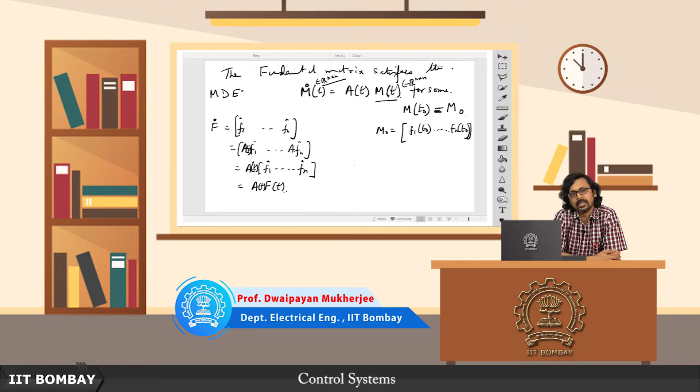Hello and welcome back to another lecture on control systems. In the previous lecture we started to look at this curious object called linear time varying systems. They are different from what we've studied so far in that they are time varying, but at the same time they share some fundamental similar properties with the systems we've studied, in that they are still linear nonetheless. So we expect some nice properties to carry over, while quite a few other properties vanish into thin air.

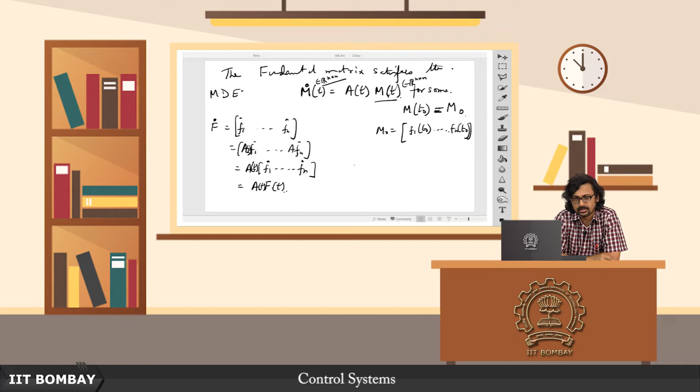That's probably one of the motivations behind looking at this, apart from the fact that we can take a peek into linear time varying systems using the state space method, which would otherwise not have been possible if we were dealing only with Laplace transform and transfer function domain methods, that is classical control methods. Since we can, why not have a glimpse of what this has to offer. This is just a sort of digression, an excursion. We are not really looking to build a solid theory of linear time varying systems in this course.

What we saw in the last lecture, as you can see in the slide, is that we defined this so-called fundamental matrix. The starting point when we try to look for a solution of this linear time varying system is: if you can cook up these n vectors of functions, f1 through fn, such that each of them is a solution of the state space equation, that is x dot equals Ax, for different initial conditions at a given time instant t0, then you have some hope of obtaining the solution.

By no means am I suggesting that this is a trivial task. You can immediately see there is no straightforward method, no one is going to whisper into your ears what the solutions are going to be. There's that clause, that 'if' is a big if. So if you can actually obtain those n so-called linearly independent solutions for the state space system, then you can get any solution for any given initial condition. That is the whole crux of the matter.

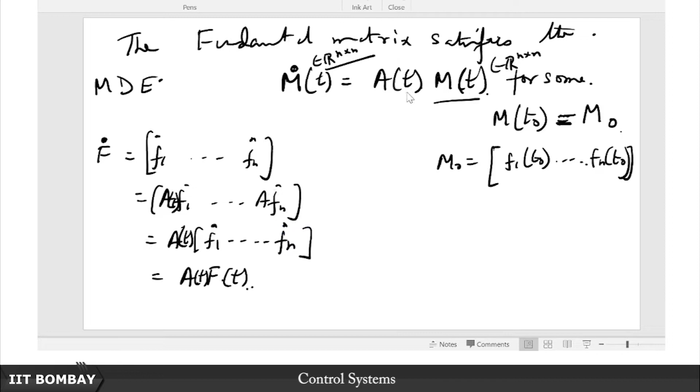So what does this say? We know that f dot is equal to A times f, and now we have this x naught written as f(t naught) times some vector c. So from this, can I not write that c is f(t naught) inverse times x naught? Of course I can, because f(t) is invertible for every time t. If it were not, it would be non-invertible for every time t - that is what we proved the other day, that is the beauty of that result. So then I can write c in this fashion.

But why am I interested in writing c in this fashion? Why exactly do I want to write c this way? Because remember, f(t) dot is equal to A(t) times f(t). This is true, is it not?

Now I am trying to find a solution for the equation x(t) dot equals - we want to solve the homogeneous equation, that is no forcing function, x dot equals A(t) x(t) such that x(t naught) equals x0. So this is what we are looking to solve.

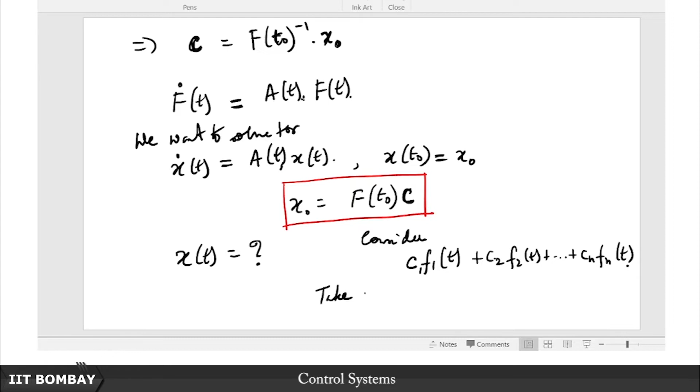Just think for a while: if you take, say, C1 F1(t) plus C2 F2(t) plus dot dot dot till Cn Fn(t), then take its time derivative. Let us say this is something I have cooked up, these same Ci's which describe my initial condition. Then what do I get? I get C1 F1 dot, omitting the T, plus C2 F2 dot plus dot dot dot till Cn Fn dot. But what is that in turn?

Notice that is going to be nothing but C1 A(t) F1(t) plus C2 A(t) F2(t) plus dot dot dot till Cn A(t) Fn(t). So that is nothing but A(t) times F(t) times C - should not write implies, it is basically equal to, so this is equal to this.

So I first started with this whole thing that I am putting in the green box now as a trial. Remember early on when you did not know these different methods of solving a differential equation, we just tried some solution to see if it works. So here we are trying to do exactly that. We will check whether this works for us.

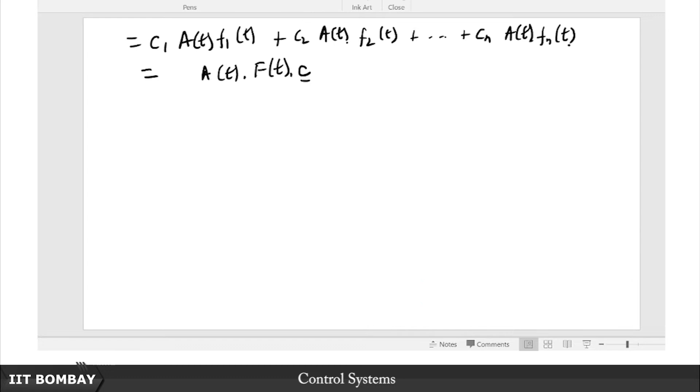Now what is this? Remember that this is nothing but F(t) times C is equal to this. So what we found now is that F(t) times C satisfies x(t) dot equals A(t) x(t), and also, by the way we have chosen this C, it satisfies the fact that f(t naught) C is equal to x naught.

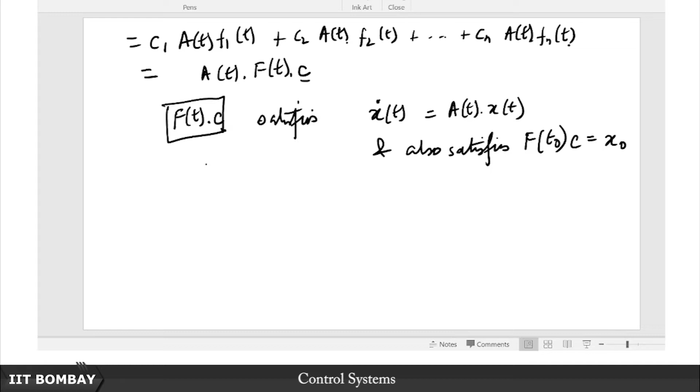So therefore this is my candidate for a solution, and again I am going to invoke that property of uniqueness. If I found one solution, then that has got to be the only solution - again something I am stating without proof. So I tried with a trial solution.

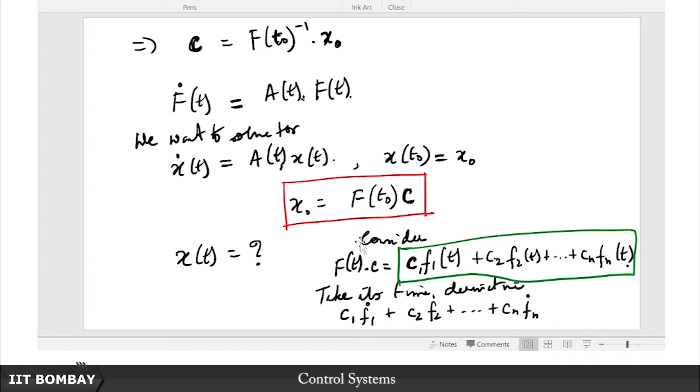What I did was: you give me an initial condition, suppose somehow someone else has given me this set of n linearly independent functions, each of which - by functions I mean n-tuple of functions. So there is f1 which is an n-tuple of functions, f2 which is an n-tuple of functions, so someone has given me this fundamental matrix, and then you give me some initial condition.

Then the trick to finding the solution is I try to find out what linear combination of the columns of the fundamental matrix at t equals t0 gives this initial condition that you have given me. Once I am able to evaluate that, I can do so using this, because f(t0) is invertible - in fact f(t) is invertible for every t, as we proved the other day - so therefore I can always obtain this C.

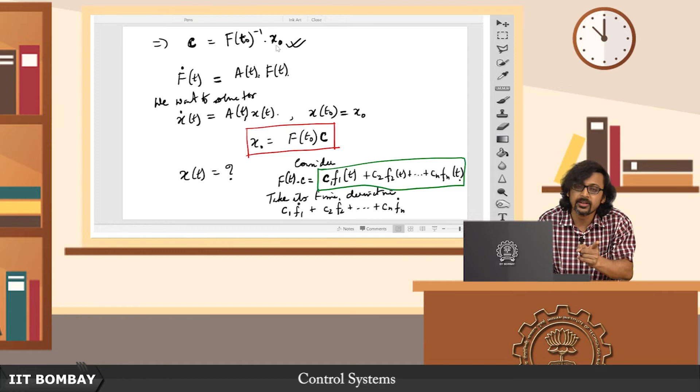So now once I have obtained this C, what I need to do is say that f(t) times C, where f(t) is this fundamental matrix which somebody has already given me, and C is something I have obtained based on the initial condition. I am claiming that f(t) times C is a solution of this homogeneous linear time varying equation, and I have shown you it satisfies the initial condition as well as the dynamics, therefore it must be a solution. Now, without proving it, I am just claiming that this has a unique solution. So if you find one solution, that is the only solution. Since I found that one solution, this is the solution.

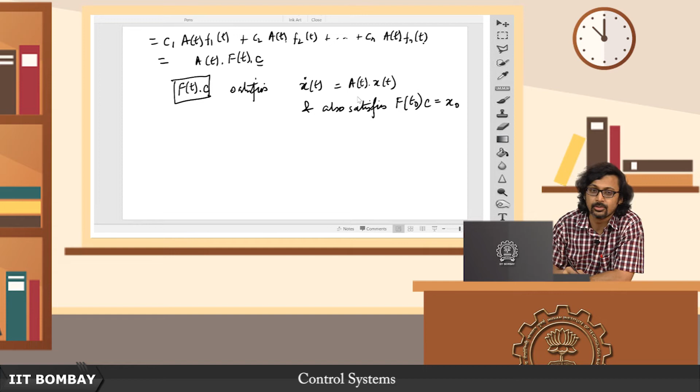So the solution is x(t), let me put that inside a green box: x(t) is equal to f(t)C. But you might not be happy with the C, after all the C is something I have obtained. This doesn't give me something methodical. The thing I started with is F, the fundamental matrix. Someone's given me the fundamental matrix, someone's given me x naught, so I want the solution in terms of those only. But the C is something I derived along the way.

So how do I replace this C? It's already there before you. I'm going to substitute C here, and then the final solution is going to be x(t) is equal to f(t) times f(t naught) inverse times x naught. And now you see I have got the entire solution.

You give me any initial condition, someone's given me the fundamental matrix, which is basically a set of n-tuples of functions such that each column of the fundamental matrix is a solution of the state equation, and those n-tuples are linearly independent. So someone's given me the fundamental matrix, someone's given me the initial condition, and I can tell them you need look no further, this is going to be the solution. Now it turns out for this you just need knowledge of the fundamental matrix, just substitute t's and t0's, t0 being a constant, the same initial instant from which you are starting your ODE, your observation starts at t0, so it's the initial value problem.

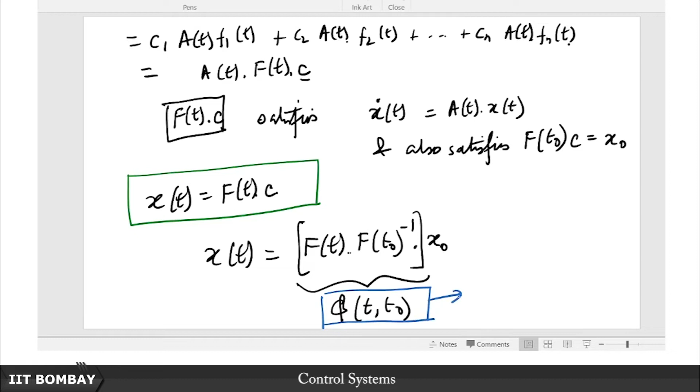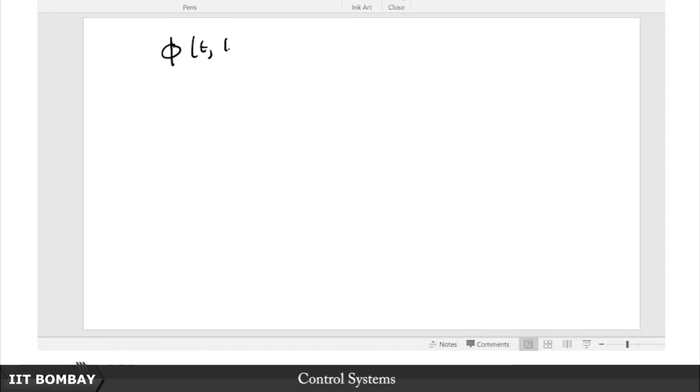Now I'll define another term here, this turns out to be defined as the state transition matrix. So far I have just been talking about this fundamental matrix, now this is called the state transition matrix. What is the state transition matrix? It is defined in this fashion: if you know what a fundamental matrix is, then the state transition matrix phi(t, t naught) is given by f(t) times f(t naught) inverse. So this is the definition.

So this is what it is. So why is this t comma t naught? Because it is time varying, you see. So as I showed you the other day, if it is time invariant, then the only thing that matters is the duration of time that has elapsed since you started your observation and the current instant.

So whether you start your observation in 2021 and look 1 year hence, whatever solution you get, if it is a time invariant system, then if you had set up your equation in 2015 and looked 1 year hence in 2016, you would have got exactly the same solution, since it is linear time invariant. But for a linear time varying system, the system has changed, the parameters have changed with time.

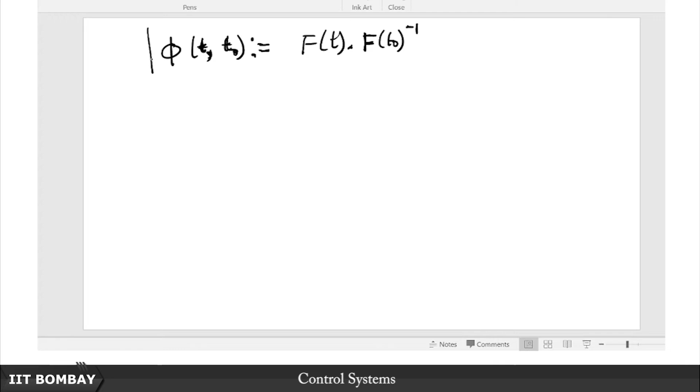So whatever output you got 1 year later by setting it up in 2016 or 2015 would not be the same as what you would get by setting it up in 2021 and looking for the solution in 2022. That is the case of a time varying system. So therefore you cannot just define this as a function of t minus t naught, but it is dependent on when you are looking for the solution and when you started your observation, both these instants, not just their difference, very important. So this is how we define the state transition matrix, and now you should be able to recall something very similar that we have done just a couple of lectures back.

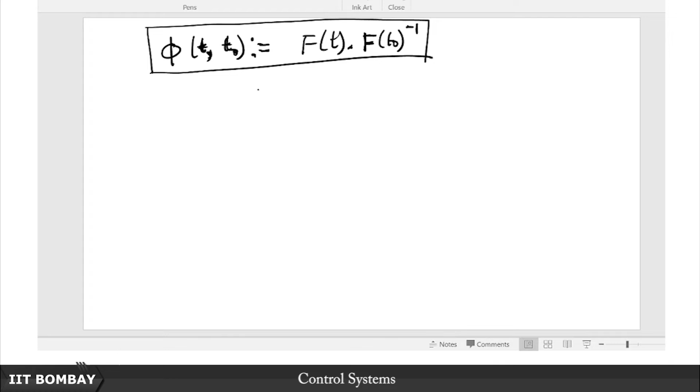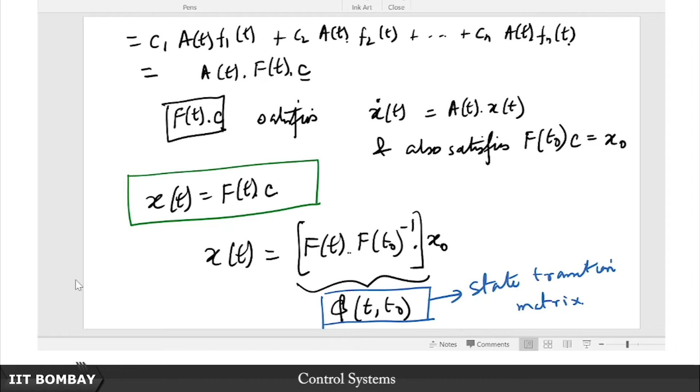It turns out that this has an uncanny resemblance with something we already know, the matrix exponential, remember, in case of the linear time invariant system. It turns out that the matrix exponential is nothing but the same state transition matrix for a linear time invariant system. So immediately there are a few properties of this state transition matrix.

So some quick properties - they are not really very difficult once you know how you have obtained this state transition matrix from this fundamental matrix. Once that concept is clear, you would know that it is obvious.

The first property is that phi(t, t naught) is non-singular for every t. Why should it be so? Well, of course, just see what is the definition here.

So check that f(t naught) f(t) inverse is an inverse for phi(t, t naught) for all t. Just try it out, just hit this fellow either on the right or on the left with this fellow, and you see you will end up with identity. So, if at every value of t there is an inverse for this fellow, this state transition matrix, then obviously it is going to be non-singular.

And why am I sure that this f(t) inverse will exist? Again, go back to the definition of fundamental matrix, the property we proved for the fundamental matrix, the fact that the fundamental matrix must be non-singular for every time instant t. That is its very definition, its property. So this is a very trivial property then - once you know that it comes from the fundamental matrix, there is really nothing to prove here.

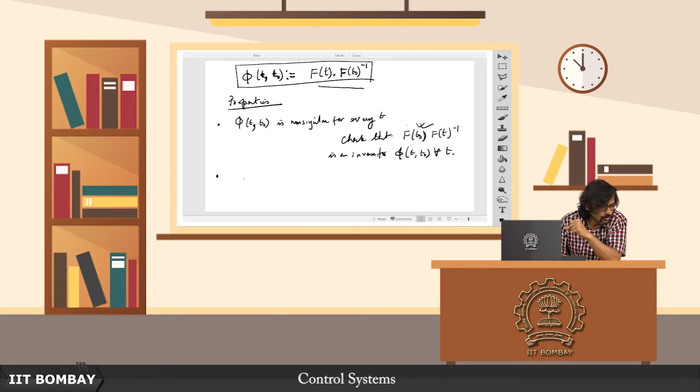The second property is that phi satisfies this: phi(t, t naught). If you take the partial derivative with respect to time, it satisfies the matrix differential equation with initial condition phi(t0, t0) is equal to I.

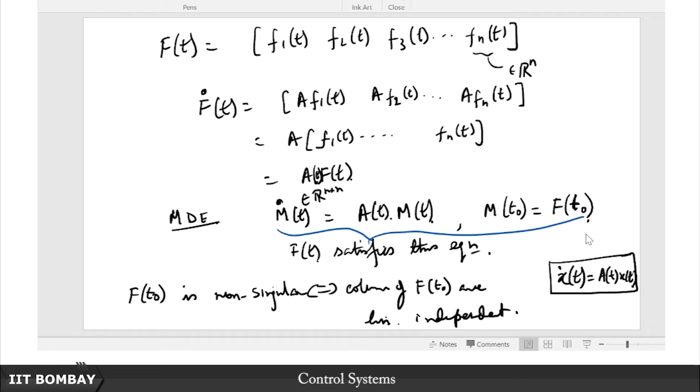So that same equation you see what we started with earlier when we were dealing with the fundamental matrix. When we talked about it in terms of the fundamental matrix, then the initial condition of this matrix differential equation was f(t naught). Now, I am saying if you want the initial condition to be the identity, then your fundamental matrix...

So basically it is like if you know of any iterative method - that is why I said it is not a trivial problem. This analysis, all this we are doing, is fine, but computation-wise it is a very difficult problem to obtain the state transition matrix. By no means is it trivial. So if you know of any computational method by which you can iteratively keep integrating, Euler integration or whatever, then you set up your matrix differential equation with an initial condition equal to the identity and you keep integrating it. What you will get at the output of the integral is basically going to be this state transition matrix. Not a very wieldy way, is it? It is rather unwieldy.

That has been a long standing problem, how to actually get efficient, computationally efficient methods for getting this state transition matrix. It is not like evaluating e to the At, for which we have seen already three methods. Of course, that is again not to say that computationally that is an easy thing to compute e to the At - we are talking about hand computation for the purpose maybe for your examination or for your concepts, where we mostly do not go beyond 3 by 3 matrices. For large matrices, even evaluating e to the At, that is the state transition matrix for a linear time invariant system, is also not a very easy task.

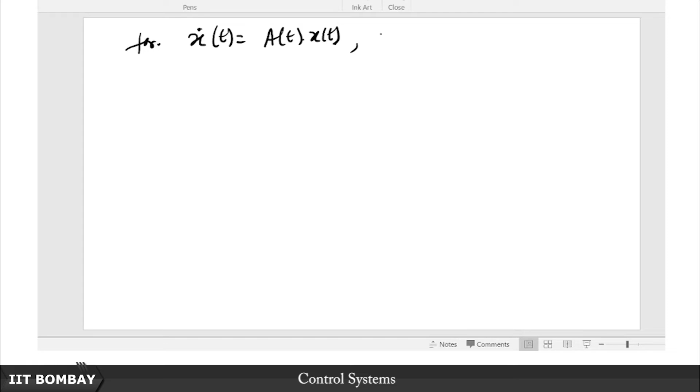But why is this important? Why is this so interesting? It is interesting for the simple reason that, now notice that for x dot(t) is equal to A(t) x(t) with x(t naught) equal to x naught, we have x(t) - earlier we described the solution in terms of the fundamental matrix, now we will describe the solution in terms of the state transition matrix, and that is what justifies this name.

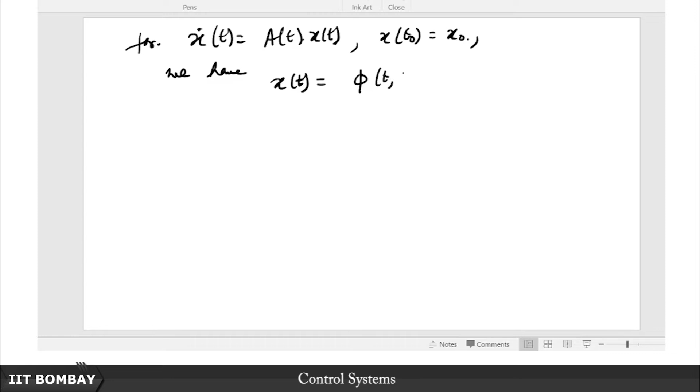What is this showing me? This transition matrix is like an operator to which if you give the input, the state vector at some time instant t naught, then the output of that operator will be the state vector at the time instant t. It is as if it is telling you how the state transitions as time evolves, how the state transitions from one particular bunch of values to another.

So without even looking at the differential equation, without solving for this, once you know the pattern of this phi t comma t0, the state transition matrix, then this actually tells you how your state transitions. So the name is very common sense based, that is why it is called a state transition matrix.

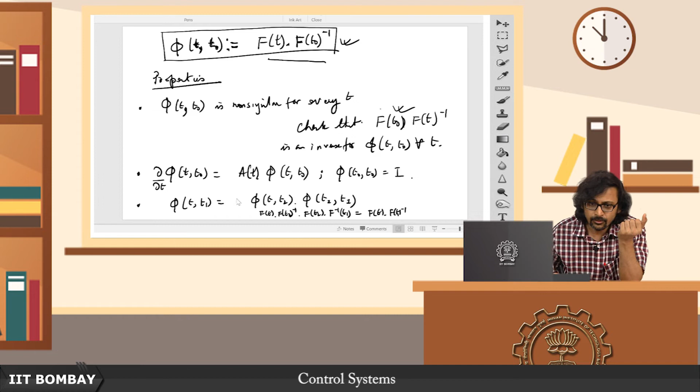Now notice, in the light of this, what does this tell you? It tells you that if I have 3 instants of time, say t1, t2, t3, and I know the state vector at t1, at t2, and at t3, then I am saying that for this bit the transition matrix is phi t2 comma t1, and for this bit the transition matrix is phi t3 comma t2.

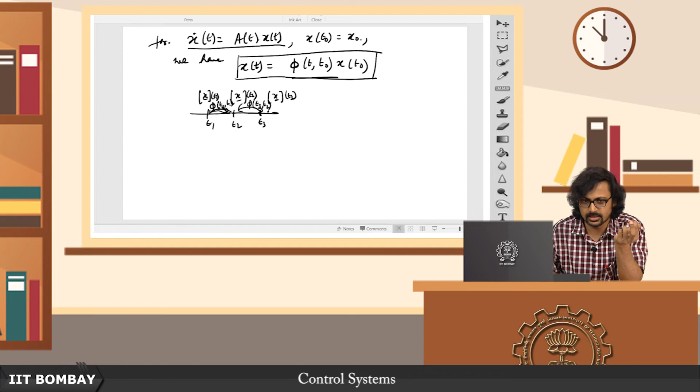So it turns out that if you know piecewise, in these small segments, the transition matrix, then this is like composition of operators. If you want to find out the overall transition matrix from t1 to t3, all that you need to do is multiply those two matrices: phi t3 t2 times phi t2 t1, that is going to be equal to phi t3 t1. So this entire transition from t1 to t3 is captured by these piecewise transitions from t1 to t2 and t2 to t3. That is what this property is telling us.

So that is why this is an interesting and important property. You can immediately relate to this state transition matrix in exactly the same way as you did with the matrix exponential for the linear time invariant system. Having come this far, it would be sad if we did not go a little further and try to draw the analogy and completely close the case thereafter.

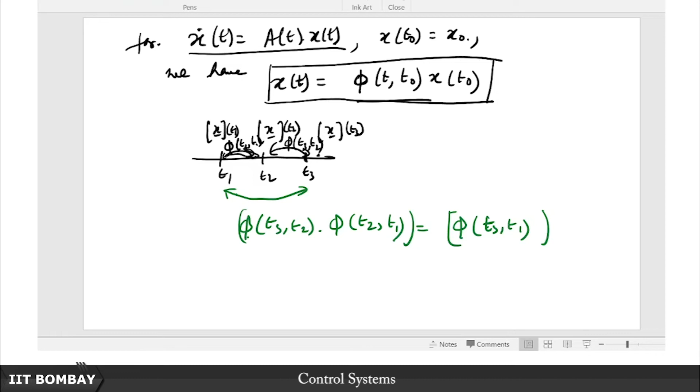So what are we trying to do here? We are trying to draw some analogy, some parallels between the linear time invariant case and the linear time varying case that we are now seeing. Here is the first sort of claim, which is a little non-trivial. I am not suggesting that this particular result is going to help you computationally in obtaining the state transition matrix, but here is the claim.

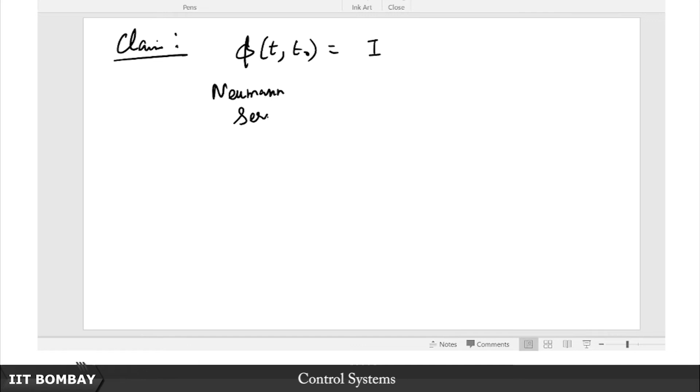The claim is that this phi t, t naught is given by this series, this is called the Neumann series - I do not remember if it was a double n or a single n, excuse me for that. So this is given by the integral from t naught to t of a tau 1 d tau 1,

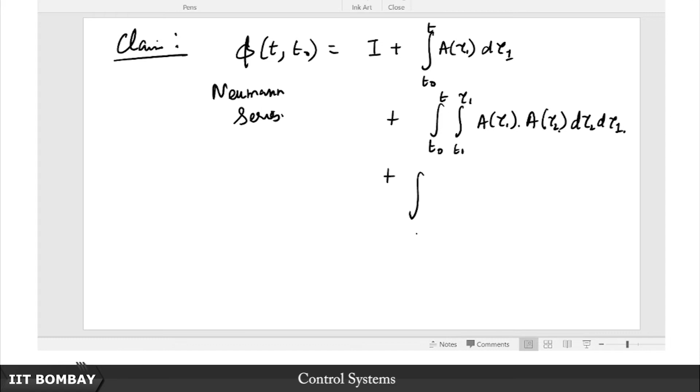plus an integral from t naught to t, and then another integral from t naught to tau 1, of a tau 1, a tau 2, d tau 2, d tau 1 - sorry, there should not be a bracket here. I will drop to the third term because this is an infinite series, just like you had an infinite series for the linear time invariant case, here also you will have an infinite series. Then you have an integral from t0 to tau 1, and an integral from t0 to tau 2,

and here you will start integrations from, let us say, d tau 3, d tau 2, d tau 1, and in the middle in the integrand you will have a as a function of tau 1, a as a function of tau 2, a as a function of tau 3, and so on. So it's an infinite series, it goes on till infinity, ad infinitum.

Now the claim is that this is nothing but phi of t comma t naught, the state transition matrix. So what is the way to show this? What is the most quintessential property of this state transition matrix?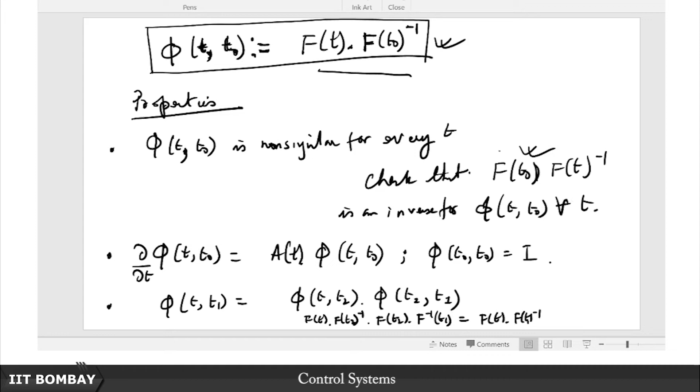I know that this state transition matrix, for one, it better satisfy that phi t naught comma t naught is equal to identity. So if I check that these two properties are satisfied, because remember every other property you can prove from this.

So if I prove that these two properties are satisfied, the second property is that if I take the partial derivative of phi t comma t naught with respect to t, then I should get this, because this is after all the solution of the matrix differential equation.

So taken together these two conditions are just telling me that phi is the unique solution of the matrix differential equation given by M dot is equal to A of t M of t, where the initial value of this m is going to be the identity matrix. So if I can prove these two, then I would be done showing that.

Essentially what I am saying is that if I can show that the right hand side satisfies these two properties, then I am done.

Now you see there is nothing to prove in the first one, you just plug in, instead of t you just plug in t0. What happens? If you plug in t is equal to t0 here, this integrand vanishes. If you plug in t is equal to t0 here, this integrand also vanishes.

So every integrand you see, because the last integral is from t0 to t, you just substitute t0 instead of t, because after all that is what you are doing here, in this first property, you are substituting, replacing t with t0. So you substitute t with t0 in every one of these integrations, all these integrations will vanish and you will just have identity.

So this property is proved, just write it up a bit, it is not a big deal at all. So this property is proved.

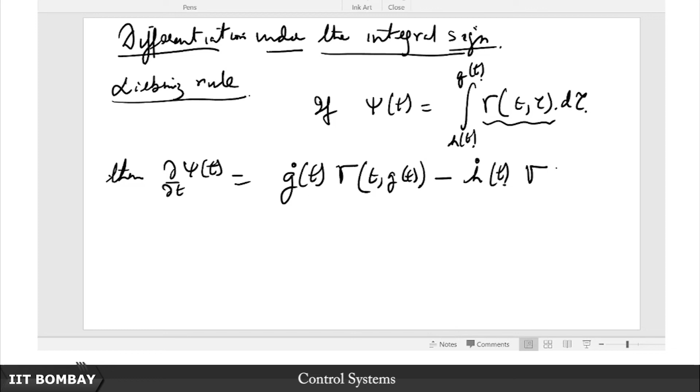Plus now you retain the integral as it is, ht to gt, and inside the integral you differentiate gamma with respect to t, not tau, and then take its integral. So this is basically the Leibniz rule, in case you have forgotten. Yeah, so this is what Leibniz rule is.

Now if I want to apply this Leibniz rule to each of these integrations here, you see what is the function of t here? There is only one thing that is a function of t.

You see the way in which I have written the series, only the upper limit, that too of the last integration in each of these, is a function of t, because everything else is the integrand. Look at this integrand here, there is no t here, it is not a function of t, so this last term will not arise. The lower limit is also not a function of t, they are all constants, so they will also not matter. So the only term I will have to deal with in my particular example is just this.

So if I just apply this property, what do I get? Let me look at the first term here. Of course the identity will vanish, since it is a constant, so differentiating with respect to time it vanishes. What about the first term? What I will get is basically a of t, that is it. So basically the first term is going to be a of t.

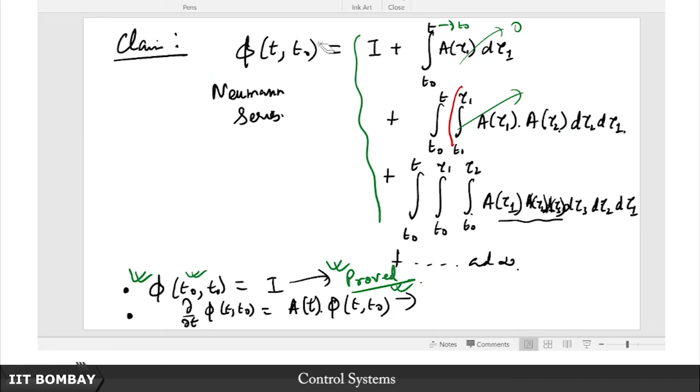You see, they are all going to shed one integration each. So what is going to be the second term here? Look at the second term. Again, up until this part nothing matters, sorry, I should probably exclude that d tau 1. So up until this part nothing matters, and similarly here, up until this part nothing matters. This is my gamma, the way I have defined gamma here, this is the gamma, alright, so nothing matters.

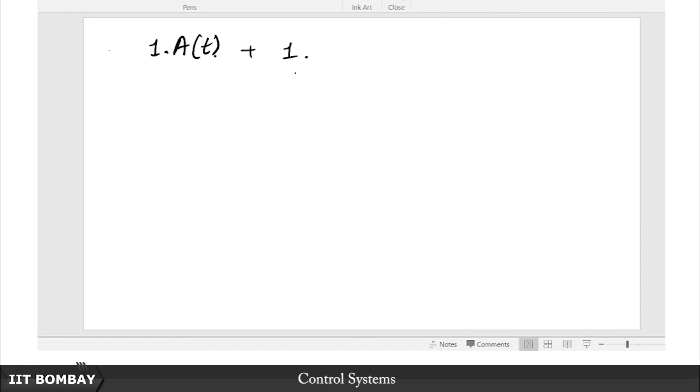So the only thing I have to differentiate is this t, and the ddt of t is 1. So in each of these terms I will have plus 1 times, what am I going to pull out of this? I am just going to pull out whatever is sitting here as the last integral, that is basically this, just like this is the term here, because this is going to be integrated with respect to tau 1, with tau 1 running from t0 to t. So I am just going to pull out this. This tau 1 is my proxy for tau here, this is my tau. So the nested integrals inside do not matter, it is just the last integration that is going to matter.

Because I am just taking the derivative with respect to this one. The others, their limits are not functions of time, and the integrand itself is also not a function of time. So as I said, I do not need to bother about this term or that term, I am just concerned about this term, and that too of the first integration, okay. Now if I do that, then each of the terms, you see, I am going to just pull out another a here, but with this, now in the second term only one of the integrations will remain.

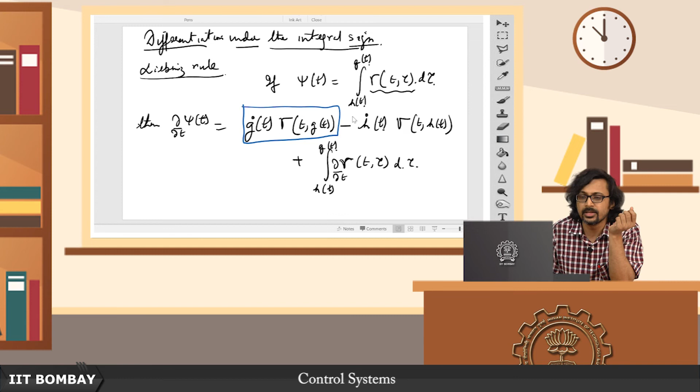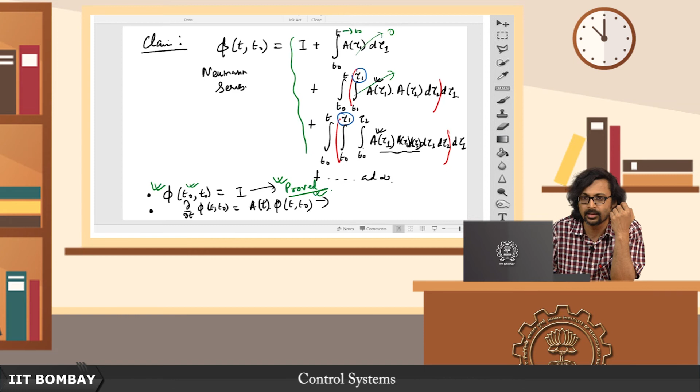So it is going to be this a tau 2, d tau 2, from t0 to, okay, so remember that I have to substitute this h of this, g of t as the upper limit. So g of t is t, right, so wherever there is this tau I have to substitute t here. So what is my tau? The role of tau is being played by tau 1 in my case. So that is another subtle thing. So this tau 1 is basically playing the proxy of the tau that I have defined in my general definition of the Leibniz rule here.

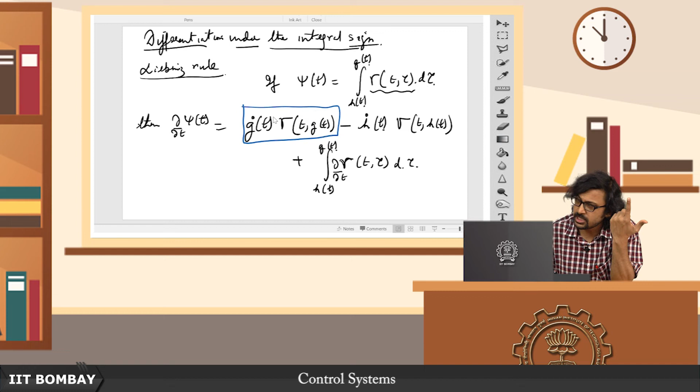This g of t, yeah, so now instead of d tau here I have d tau 1 here. So wherever you see tau 1, it will play the role of this tau. So you replace the tau with g of t. So wherever you see tau 1, you now replace it with g of t. What is g of t? G of t is t, so you replace it with t. So now notice what is this? This is basically now the original expression's first term.

So then this is going to be nothing but A of t times phi of t comma t naught. So if indeed I had started with defining my phi of t comma t naught like this, then I see that it actually satisfies this equation. So therefore this series, I am not saying is very useful computationally, but this series in theory gives you the state transition matrix.

And now look at something curious, if you now want to sort of retrace your steps back, that is if you are not very happy with, I mean of course there are still issues with this, I have not proved a lot of things, I have just imposed it upon you again, but this is another way to see. Now you go back to the time invariant case.

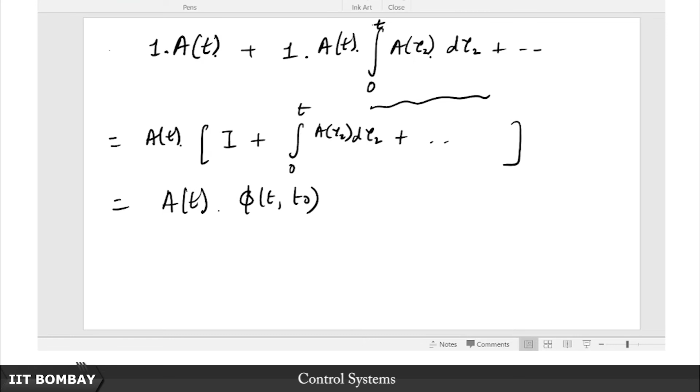So in the time invariant case, this A will not be a function of time. So if this A is not a function of time, then what is this going to be? This is all going to be just A, right. So what is this in the time invariant case? In the LTI case, what do we have here then?

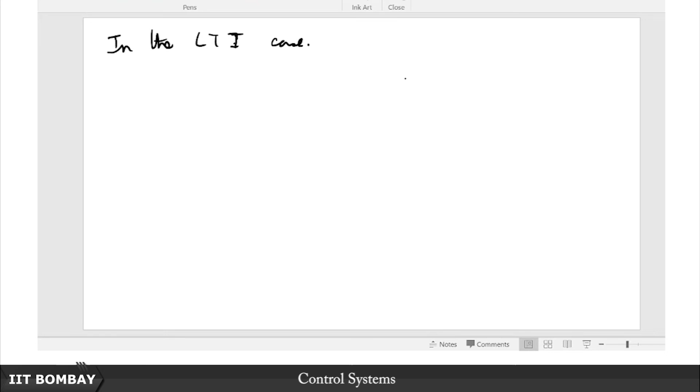Phi of t comma t naught is given by I plus, look at this series, this is going to be A t, the A is a constant, so it is going to be pulled out, so it is going to be A t minus t naught, to be precise.

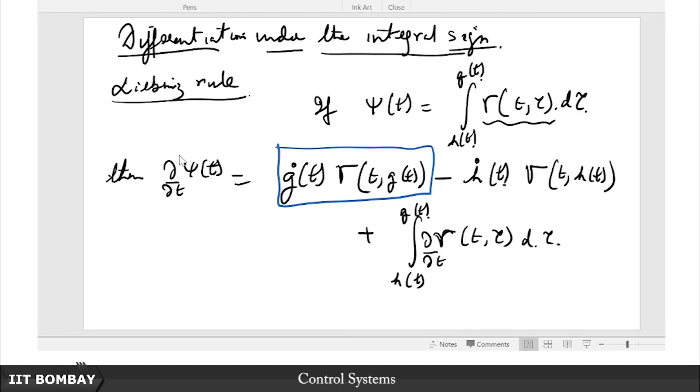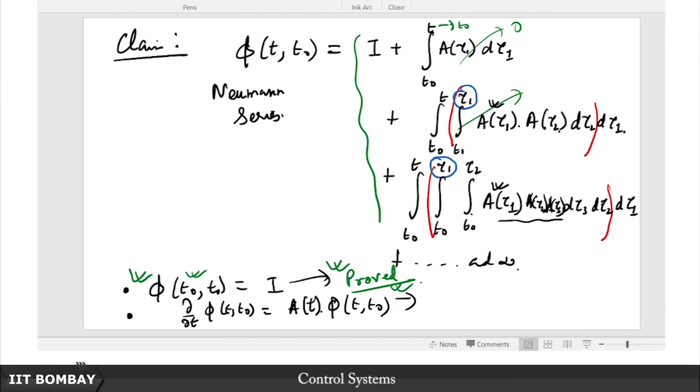Plus, now you look at the second term here, sorry here, so it is going to be A squared, so you first integrate and you get t, and then you integrate another time and you get t squared by factorial 2, rather t squared by 2, so you get A t minus t0 squared by factorial 2, likewise.

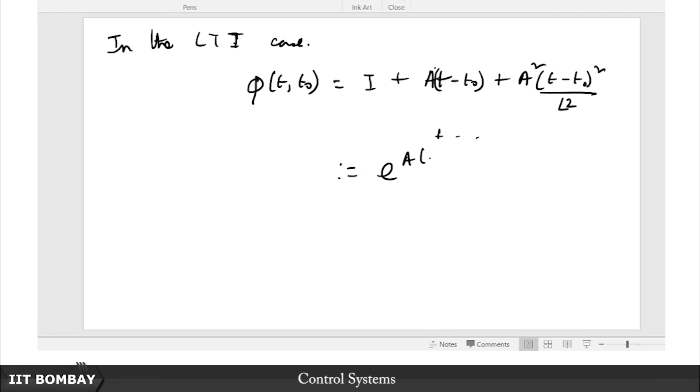But what is this series? This we have already defined by our definition, this is e to the A times t minus t0, right.

So in other words what I am saying is that we have made so much effort to derive the state transition matrix, but it is exactly as we suspected, this is playing the same role as the matrix exponential as can now be seen, because just like here, in the linear time varying case, this when multiplying x of t naught gives me x of t, here also I have e to the A times t minus t naught, when multiplying x of t naught gives me x of t.

So this is indeed this matrix exponential. Now you learnt of another name that this has, this is also the state transition matrix for the linear time invariant state space system of equations, right. So that is the analogy.

So hopefully you have enjoyed this part, seeing it from another aspect and seeing what the commonalities between the linear time invariant and the linear time varying cases are, and also how the linear time varying case is actually way more complicated, because there are a lot of things we have supposed that someone has told me what the fundamental matrix is, right. That is a huge piece of information.

It is by no means a trivial problem, it is way more complicated in fact than just obtaining the n eigenvalues. You might still have some hope for using numerical methods to find eigenvalues, right, but obtaining this n linearly independent solutions which is required for the linear time varying case is really not at all trivial by any means, okay.

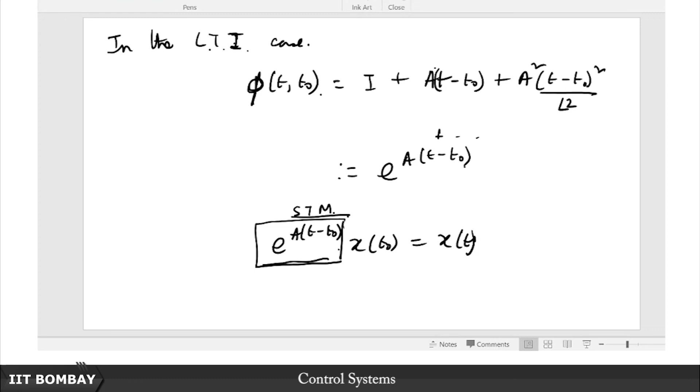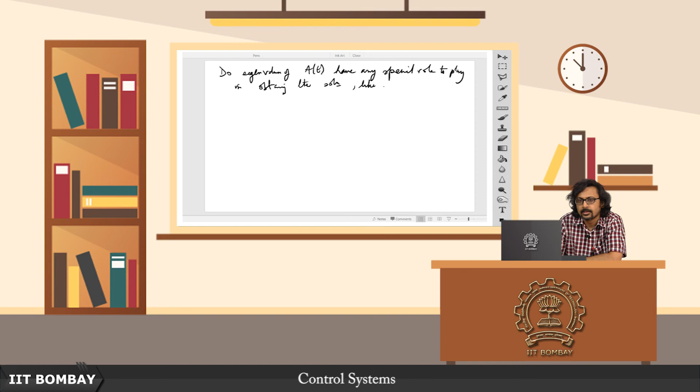So before we close out this bit of discussion on this linear time varying case, here is a warning. So we made a big deal about these poles of transfer functions and their relation with eigenvalues of the A matrix in case of this time invariant system, right. So you might wonder, does any eigenvalue of this A of t have any special role to play in obtaining the solution like they did in case of LTI systems.

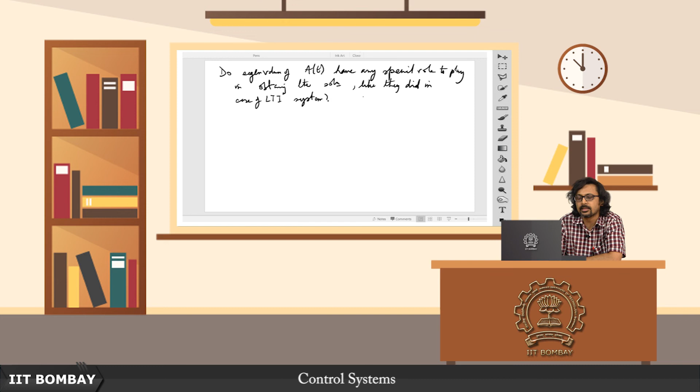So remember in the LTI systems we had this eigenvalue eigenvector equation, and therefrom we got these sufficient number of eigenvectors, if not then some generalized eigenvectors.

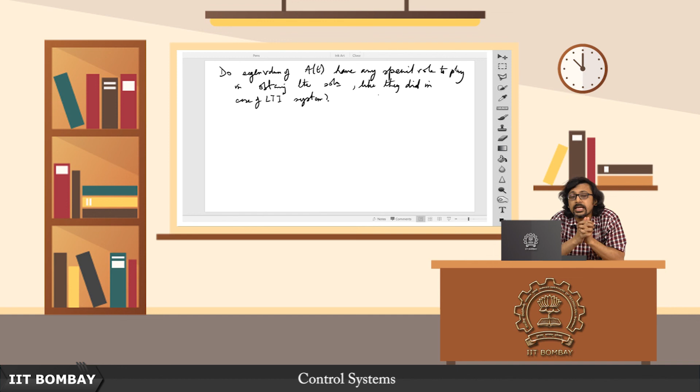If there were complex eigenvalues, we took the real part and imaginary part, isolated them, and eventually cooked up n linearly independent eigen or generalized eigenvectors, getting to a diagonal form, Jordan form, or block diagonal form, whichever is more convenient. This allowed us to evaluate e to the At, the matrix exponential. That is indeed pivotal to obtaining the solution of a linear time invariant system.

Now you might wonder if something like that also happens in case of linear time varying systems. For one, you can have no such hope, because in general it is not even guaranteed that these eigenvalues will be constants. If the A matrix has entries that are functions of time, and you try to find the determinant of lambda I minus A of t and equate it to 0, then your lambdas will probably be functions of time, lambda 1 of t, lambda 2 of t, and so on. So this is really not very helpful at all, it seems.

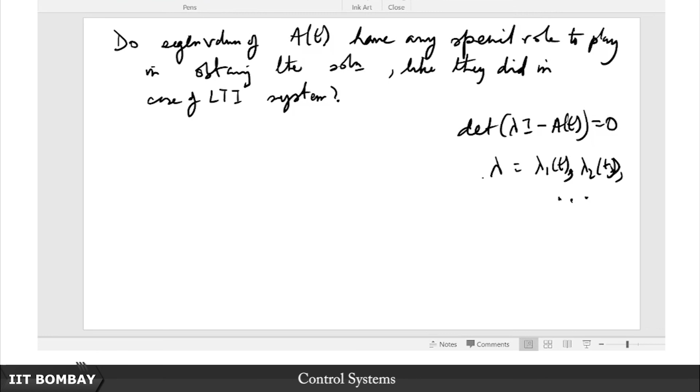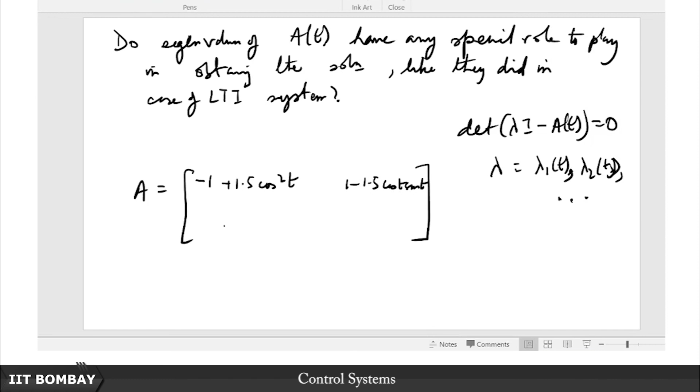The other crucially important thing, let me give you an example, and you can do this computation on your own to convince yourself I am correct. Suppose I give you this matrix: minus 1 plus 1.5 cos squared t, 1 minus 1.5 cos t sin t, minus 1 minus 1.5 sin t cos t, minus 1 plus 1.5 sin squared t.

Now, this is clearly a time varying matrix. However, by some apparent accident or good fortune, which we will see later is really not much of a good fortune after all, we find that even though each entry of this matrix is a function of time, the eigenvalues actually turn out to be minus 1 plus or minus i times the square root of 7, upon 4. So you might now raise your hopes high.

Well, you said that if you find eigenvalues that are functions of time, it seems like there is a glitch, so it does not help. But I wonder, if the eigenvalues do not end up as functions of time but rather as constants, can this somehow help? Unfortunately I have to bring bad news here, this really does not help at all. So do not fall into the pitfall of thinking that whatever story the eigenvalues told in the case of the linear time invariant system, we can extract some similar story from the eigenvalues of the A matrix in the case of a linear time varying system.

The eigenvalue evaluation will be an exercise in futility if you are really trying to analyze anything qualitatively about the system when the system is a linear time varying system.

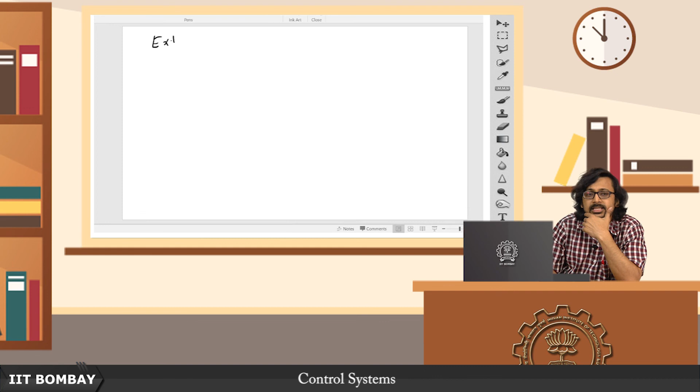Now, it turns out that this sort of stability notion is really what we call external stability. There is a name for it which you might have encountered in other courses on signals and systems, called BIBO stability, which is bounded input, bounded output stability. That means if you give a bounded input to a system, bounded in magnitude for all instants of time, then the output will also be bounded for all instants of time.

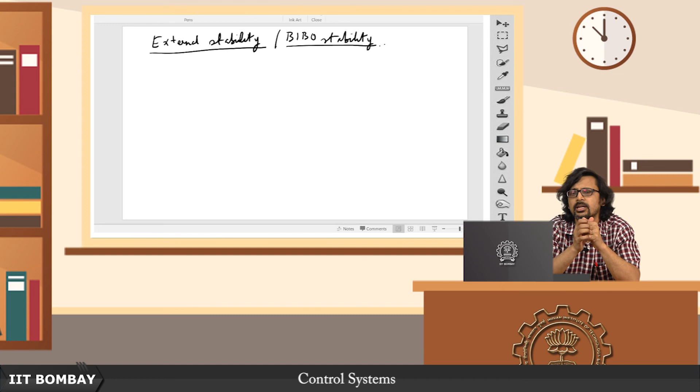It turns out that the condition required for that is exactly the requirement that the poles of the transfer function be on the left half plane, because by the classical definition of BIBO stability it is not very helpful on its own. So we will get into the classical definition and work out that condition a little bit, but we will see that the classical definition per se does not help.

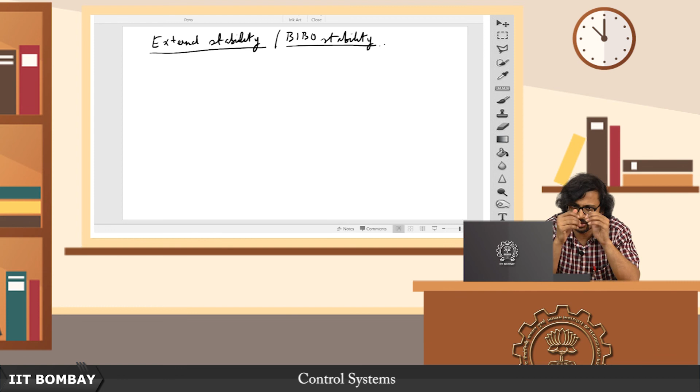The more useful check or test for BIBO stability is: given a transfer function, find out where its poles are, as we already did using the Routh criteria, and figure out if those poles are all in the open left half plane. If they are, then it is BIBO stable.

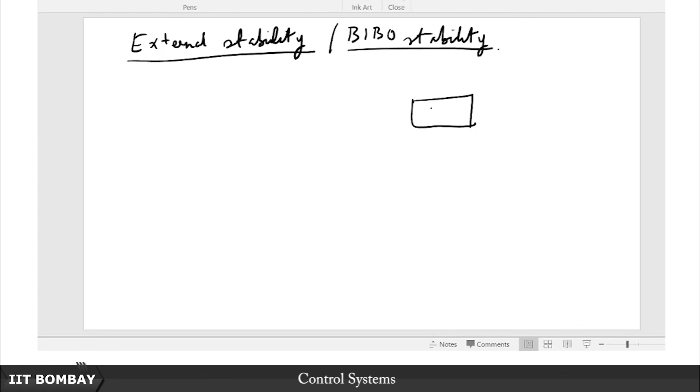You might recall, right when we started this state space based discussion, we encountered an example where we had two blocks put together: s minus 1 upon s plus 1, and then 1 upon s minus 1. You can take the combination of these two and get the overall transfer function to be nothing but 1 by s plus 1, and we saw that we run into problems because we did not account for the initial conditions. What are the initial conditions?

They are basically some states. So of course the transfer function method by itself does not account for the initial conditions. The transfer function by definition is obtained by setting the initial conditions to zero. So if you are using just the transfer function based methods, it does not give you sufficient internal description.

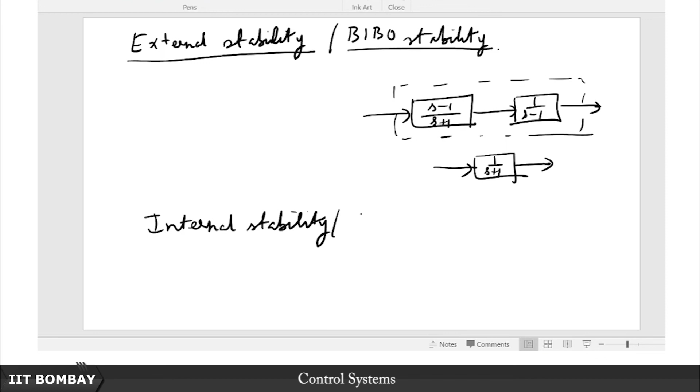It turns out that for internal stability, which we will also call asymptotic stability—none of these terms we have defined so far, we will get into those definitions in the next class. I am just giving you a brief idea into what we are going to do in the next lecture. It is going to be all about stability in the state space domain. So this internal stability, or asymptotic stability, does not really look just at the poles of the corresponding transfer function.

So you are given basically A, B, C, D now. When you are dealing with external stability you would be given a G(s), but now you are given A, B, C, D. So if you think, okay, I am just going to find C(sI minus A) inverse B plus D—that's going to be my G(s), and then apply the same tools as before.

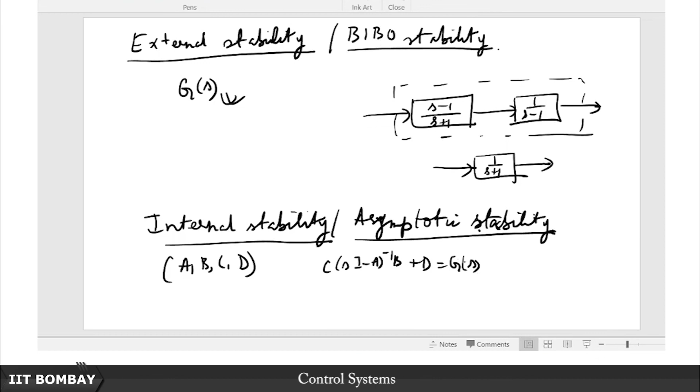But that way you are only going to get as far as BIBO stability, because if you convert the state space system to its corresponding transfer function and check for the same rules for stability as before, you would actually have no insight about what is going on inside the system. So in order to do that, it turns out what we need to do is to look for the

eigenvalues of A. So we are again back in the domain of linear time invariant systems—our brief foray into linear time varying systems is over, so we are back to talking about linear time invariant systems. These eigenvalues of A crucially determine whether a system is asymptotically or internally stable or not.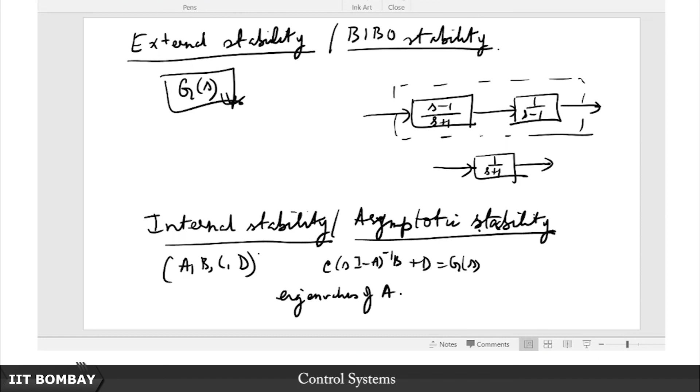Once again, to take a quick recap of what we did, the last thing we did here—you see, sometimes by accident you might get eigenvalues in the linear time varying case that are not functions of time, but that tells you nothing whatsoever about stability. Do not, I repeat, do not fall into the pitfall of assuming it is going to be stable just because the eigenvalues happen to be independent of time.

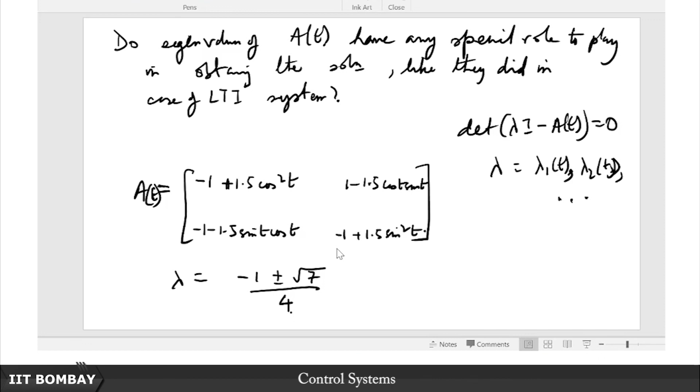There are totally different classes of rules or techniques for determining the stability of linear time varying systems. We are not really going to get into that. There are Lyapunov based methods for that. If you go for courses on nonlinear controls later on at an advanced level, you would learn about these. We will not get into that in this course.

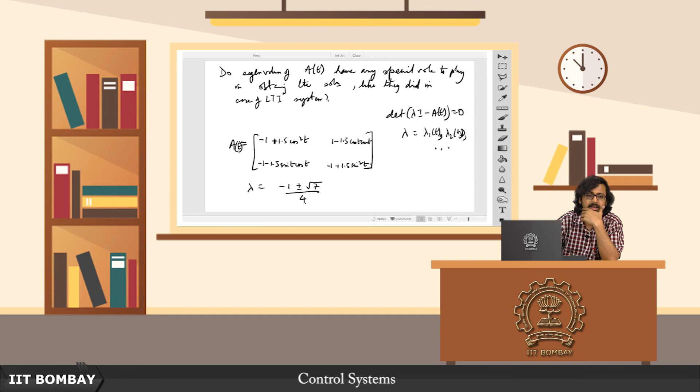The key is, the moment you get into linear time varying systems, they are a completely different beast altogether. All these things that hold for linear time invariant systems—these intuitions we have about eigenvalues and so on and so forth—none of this works there. Hopefully that is a lesson you have taken to heart, so you will not make the mistake of encountering a linear time varying system and thinking it is just a small tweak of the linear time invariant case that we can solve.

No, it is a completely different ball game altogether. So in the next lecture we shall dive deeper into this notion of stability. We shall take a closer look at BIBO stability and asymptotic stability, and see that asymptotic stability implies BIBO stability, but the converse is not necessarily true.